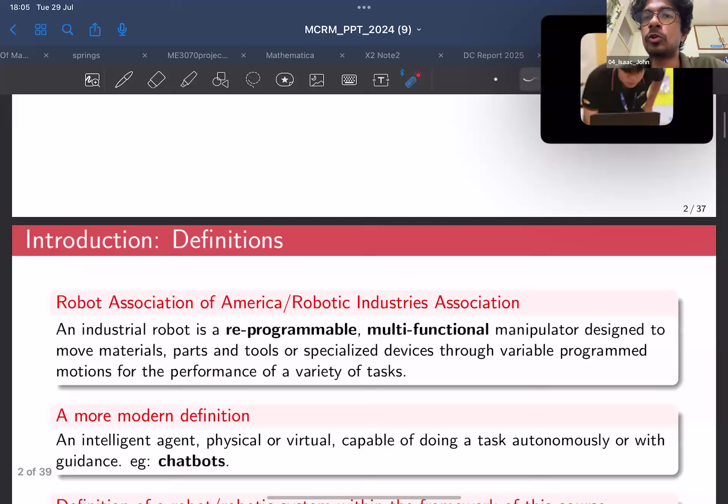Then we talk about transformation matrices, which combine information regarding position and orientation of rigid bodies. We also see compound rotations, where you have simultaneous rotations about multiple axes, and how to represent them using transformation matrices. So we'll start with brief definitions of the term robot, because this is what we are focusing on for this course.

According to the Robotic Industries Association, an industrial robot is a reprogrammable multifunctional manipulator designed to move materials, parts, tools or specialized devices through variable programmed motions for the performance of a variety of tasks. The important term to notice here is that an industrial robot is a mechanical system that we can reprogram.

Unlike machinery from a vehicle assembly line, which is not reprogrammable, most things you find in industry are fixed, designed to perform a single task. But in a robotic system, the entire mechanical manipulator or architecture can be reprogrammed for a variety of tasks and applications.

For example, you can task it to pick an object and place it onto a different conveyor belt, or use the same robot for spray painting applications. So it's very agile in that regard; you can deploy the same robotic manipulator into a variety of tasks. A more modern definition says a robot is an intelligent, physical or virtual device capable of doing a task autonomously or with guidance. Earlier we were discussing the manipulator.

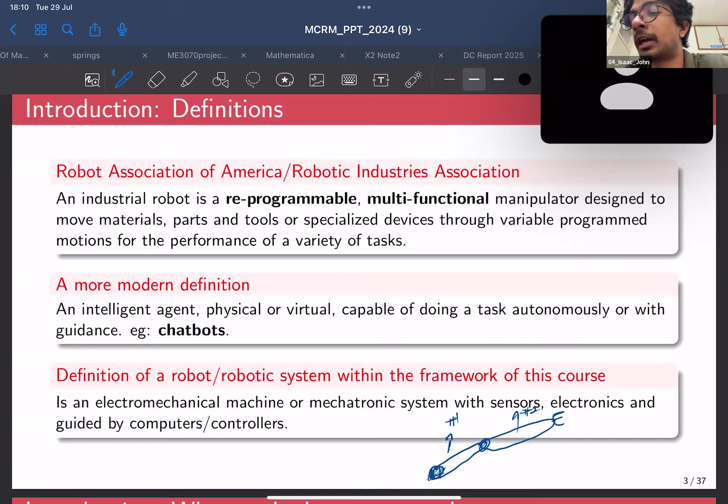For example, if you consider a robot with just two links, like so, this can be considered a robotic arm, right? I'll label this as link 1, and this as link 2. The first link is mounted or fixed to the ground using a fixed link, and then you can connect them using revolute joints. That would be the primary component of a robotic system.

Then we would have to embed the mechanical architecture with sensors and actuators. You can call the motors the actuators, probably here and here, so that we'll be able to control the motion of the robot. We also need sensors to detect its current position. One typical sensor we commonly use to determine the position of a robot is the encoder, right? We keep it on the same axis as the motors, so that we know how many degrees the joint has rotated.

So we'll basically combine a mechanical system with sensors and actuators, and using the information from the sensors and actuators, we'll be able to guide the mechanical system to whatever position we want to move it.

All right, then we talked about the 4Ds of robots. This gives an idea of where we would deploy robots. Typically, we deploy robots in tasks that can be classified as dull, dirty, dangerous, or difficult. I suppose these are self-explanatory, right? A task can be very dull for a human being because of its repetitiveness or physical exertion; doing repetitive tasks for an extended period is dull, and eventually the human's efficiency in performing the task repeatedly would drop.

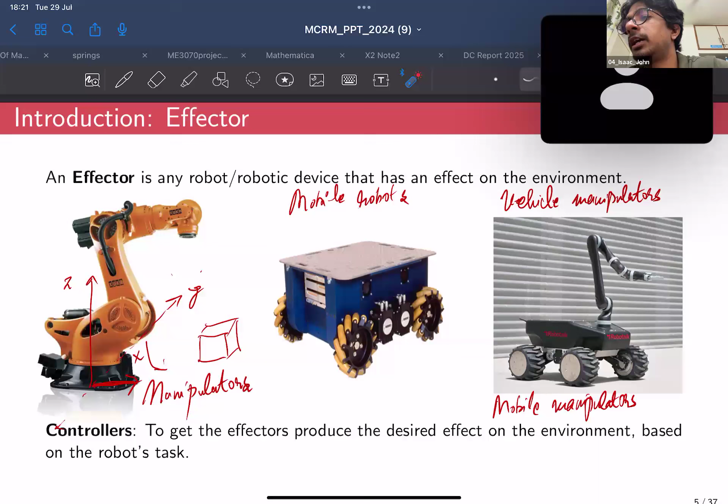Whereas in case of a mobile manipulator, it would be the combination of two. There are combinations of effect on the environment, and the resultant reaction would be the motion of the mobile robot as well as the motion of the objects within the environment. So that is the difference between how you classify a manipulator or a mobile robot. It all depends on the effect the device has on the environment. And for this course, we would be focusing more on manipulators.

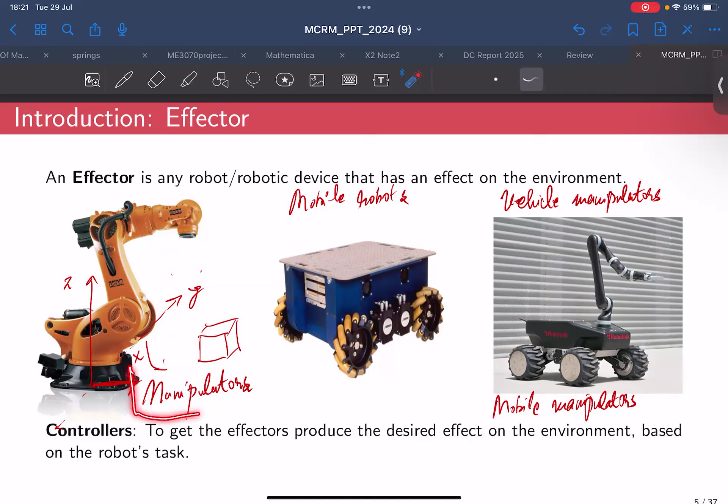Right. So now we look on to the different types of manipulators. So over to your left is a class of manipulator, what we call serial manipulators. The reason we call them serial is because the links are attached serially, one after the other. So there could be one link, the base link here, and to the base link you have another link attached serially, and to this link another link is attached. So the links are attached serially one after the other.

So if you draw a schematic, it'll look something like this. You have a base, and you have one link attached to the base. I label this as link 1. And at the tip of the first link, you will have another link, link 2, and so on and so forth. You can have any number of links, right? And at the very end of the farthermost link, you can have a gripper or any sort of end effector. So as you can see, the links are attached serially, one after the other. That is what we call serial manipulators.

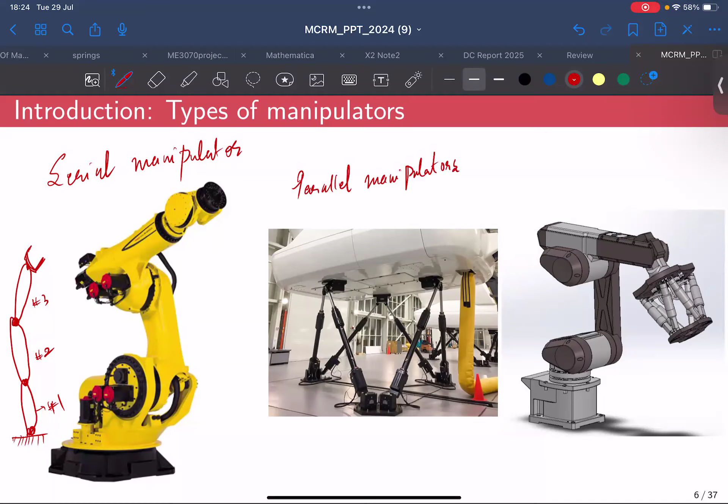Because here in this case, you can actually see that the top platform and the base are connected using parallel legs. And you can control the position and orientation of the top platform by controlling the length of these individual legs. These are telescopic legs. There is a prismatic joint in between, so that if you extend or contract this prismatic joint, the position and orientation of the top platform would change.

We would use these sort of mechanisms in aircraft simulators, where this would represent the cockpit, and people would be staying inside this capsule, so that it will basically give a real-life simulation of an aircraft cockpit. So depending upon the inputs that the pilot gives, the platform will simulate the appropriate motion.

These days, these are not only used in cockpits, they're also used in race car simulators. If racing drivers want to train or test a new circuit, they would use these sort of platforms, and the driver would sit on top of this. The platform would mimic the seat of a race car. And depending upon the input that the driver gives, the platform would simulate the appropriate motion, depending upon how fast it's going, whether he's turning, or whether he's braking or accelerating. Those sort of motions would be replicated by the parallel manipulator.

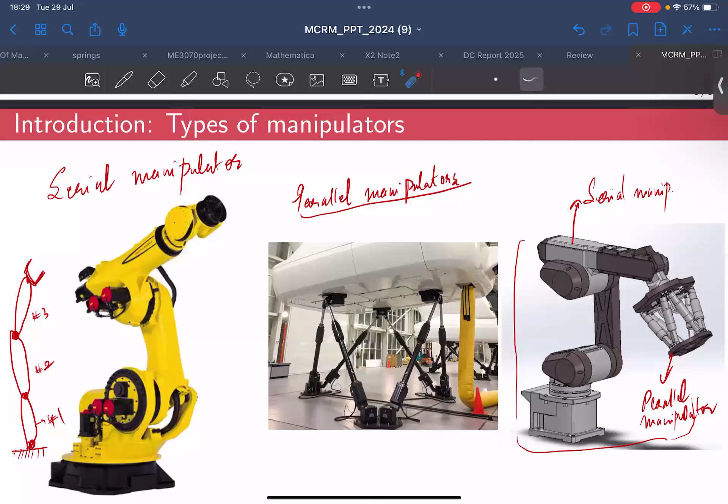Yeah, now we talk about a few key definitions or a few key terms regarding the manipulator.

So essentially, yes, sorry, yes. Yes. The explanation is great overall. I just had two doubts about the meeting itself. First, will the recording be provided to us? Yes, the recording will be provided. The problem is that I'm having some sort of an issue with today's recording, because I'm doing it in a different way than I'm supposed to. I cannot record it from my PC. On your tablet? It's on my tablet. It should be accessible, and if it is there, it'll be provided. Okay, and also, I was 5 minutes late to the meeting, so was there any attendance form given? No, there is no attendance for the meeting. Okay, got it. Thank you.

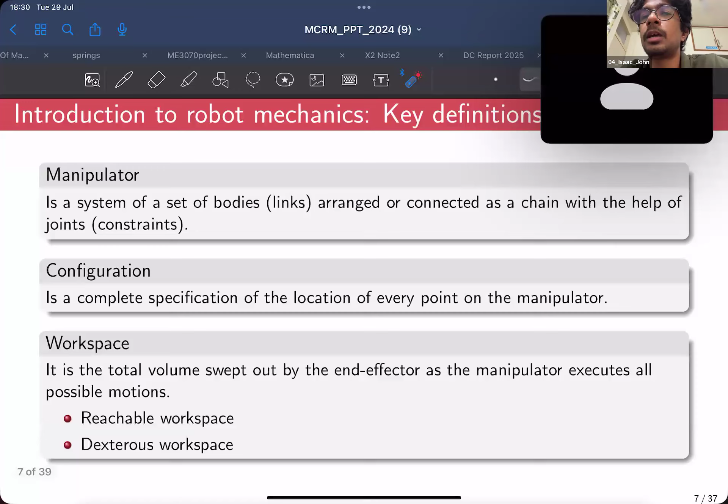Okay. All right. So now we talk about some key terms regarding manipulators. A manipulator is nothing but a system of bodies or links arranged or connected as a chain with the help of joints. So we have discussed this earlier: we have a series of rigid bodies which are connected by joints. We'll talk about different kinds of joints, maybe in the upcoming weeks. But mostly we'll be dealing with revolute joints or hinge joints, which have a single degree of freedom, as well as prismatic joints, sliding joints that also have a single degree of freedom.

Then another term that we would be using recurringly in this course is something called a configuration. The definition of configuration is a complete specification of location of every point on the manipulator. So for example, if we consider a manipulator with just two links, I'll show one example. So if this is the first link, and this is the second link, the big circles are used to represent the motors, and the first joint is actually fixed. The motor is rotating on a fixed hinge. This is the second link.

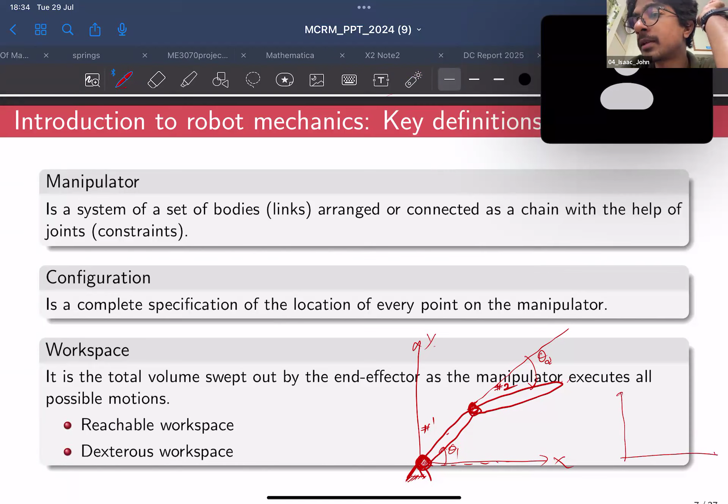Right? So if you have a global coordinate system like so, the x-axis and the y-axis, at all instants of time, you can define the x and y coordinates of any point using these theta1 and theta2 coordinates. Whereas in the case of a 4-bar mechanism, a closed loop mechanism like this, you will have 4 links, but it will be connected as a closed loop like so. You will have one joint over here, another joint over here, another over here, another over here. So you basically have 4 such links.

So in this case, you only require a single joint variable so that each and every point of the robot can be fully defined, right? We'll see all these cases when we are discussing the forward and inverse kinematics: how you can define the entire configuration of a robot with just 2 variables in case of a serial manipulator. But in case of a parallel manipulator, it becomes more complex actually. As you can see, there are 4 bodies, but you are specifying the configuration of all 4 bodies just by a single input. Right. So that's about configuration.

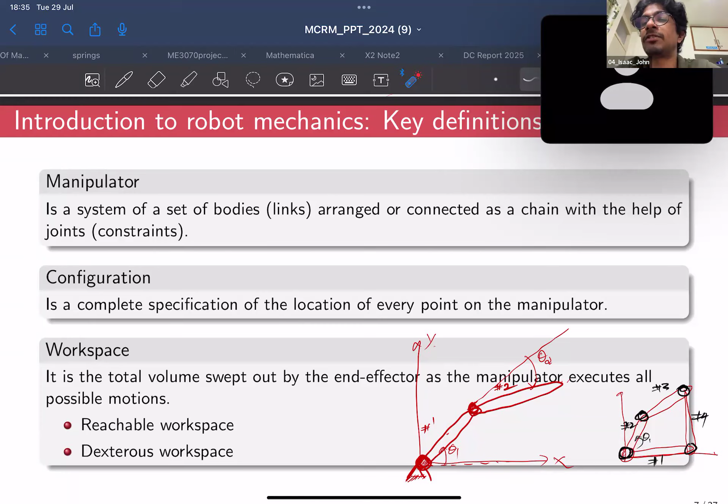It specifies the location of every point on the manipulator, and then the next term is called the workspace. This is also a very important feature in a robotic manipulator. This is the total volume swept out by the end effector as the manipulator executes all possible motions, right? So if you have a robotic manipulator with 2 joints, and you consider the tip of the manipulator as an end effector, maybe a gripper, the set of all points that can be realized by the tip of the robot is called the workspace of the robot.

So to visualize the workspace, in this specific case, you have to rotate this theta1 joint in all possible rotations. Maybe this joint can rotate from 0 to 360, and same goes for theta2. Maybe it can also rotate from 0 to 360. So if you combine all the rotations for the two joints, the net volume or the net cloud of points that the manipulator can realize is called the workspace of the robot.

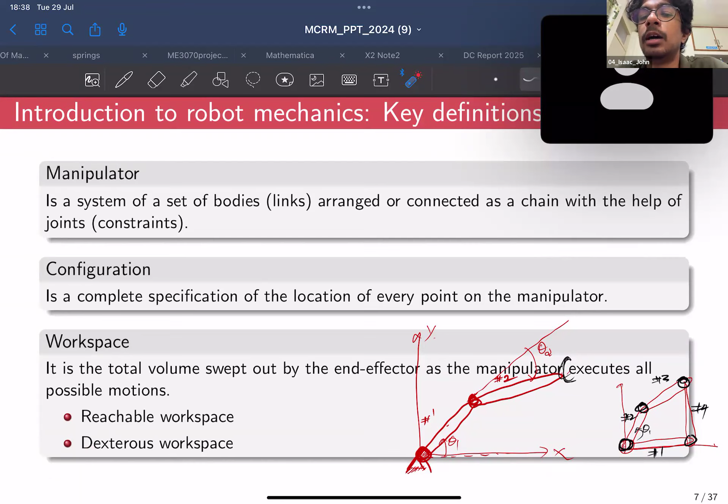Whereas in reachable workspace, you can only reach by a single or a very limited set of orientations, dexterous workspace are points where an infinite number of orientations are possible. So those are the key differences regarding the reachable and dexterous workspaces.

And then we would also talk about one key definition. It's called the degree of freedom. Throughout the course, you will be hearing this term, degrees of freedom. It's an important aspect based on which you would classify the robots, or how you would describe a robot. The fundamental way to describe a robot is by using its degrees of freedom. So the definition says degrees of freedom are the minimum number of independent variables required to describe a system, right?

So I hope you can recall, when we discussed the configuration of a robot, in case of a serial robot with two links, we used two variables, theta1 and theta2, to describe its full configuration. So you can say that robot has 2 degrees of freedom because we need two variables to describe its configuration.

Whereas in the case of a parallel robot, it would be fewer than the number of links. You would probably only need a single variable to describe its entire configuration. So that's what it says: the minimum number of independent variables required to describe a system.

And then another term called degree of manipulability. It's essentially the number of controllable inputs or active joints. In terms of manipulators, these two definitions do not make much of a difference. Degrees of freedom and degrees of manipulability correspond to the same thing. But in case of a mobile robot, these two definitions can change. There is a different meaning to a degree of freedom, and degree of manipulability could be something else. But in robotic manipulators, both of them correspond to the same value.

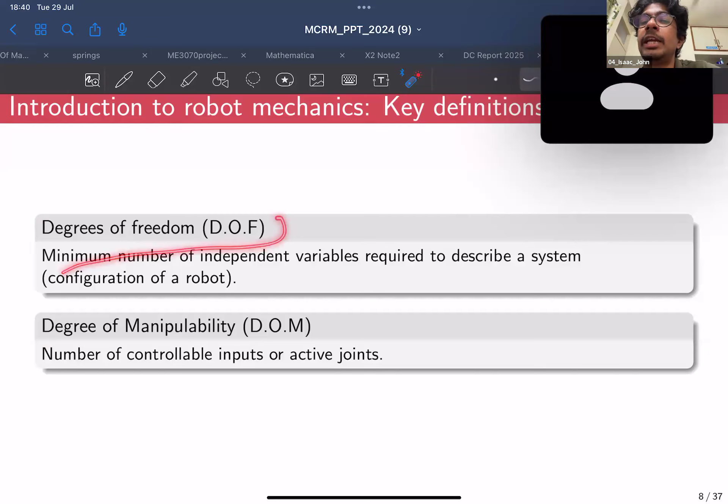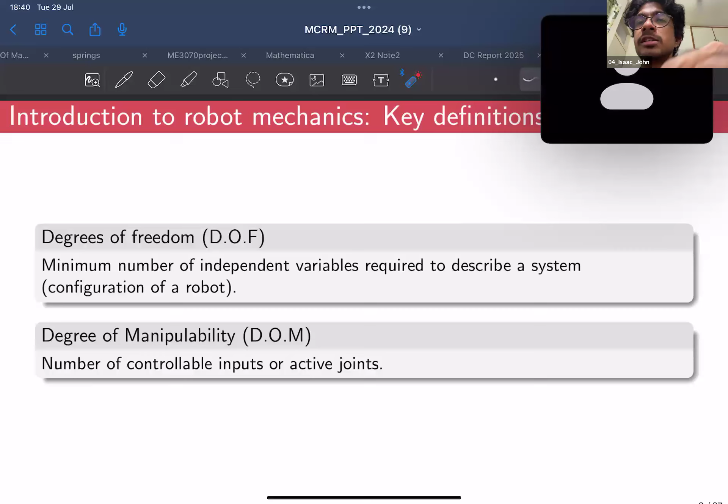But we will mostly stick with the degrees of freedom definition. We'll familiarize ourselves with all these definitions as we go through the contents of this slide.

Now we move on to the aspects of robot mechanics. Kinematics is a part of mechanics, where we just study the motion without considering the forces or efforts that cause the motion. In kinematics, we are only interested in: if you rotate the joint by 2 degrees or 3 degrees, what will be the configuration of the robot? We are not really bothered about the forces that cause this sort of motion.

For example, if you simply drop a manipulator under the influence of gravity, unless you are energizing the motors, it will most likely collapse. But in kinematics, we are not bothered about the effect of forces. We are just trying to figure out the relation between the inputs and the outputs. In a robot, we give inputs to the motors, and the output is what the robot is executing. So we are only interested in studying the input-output relations.

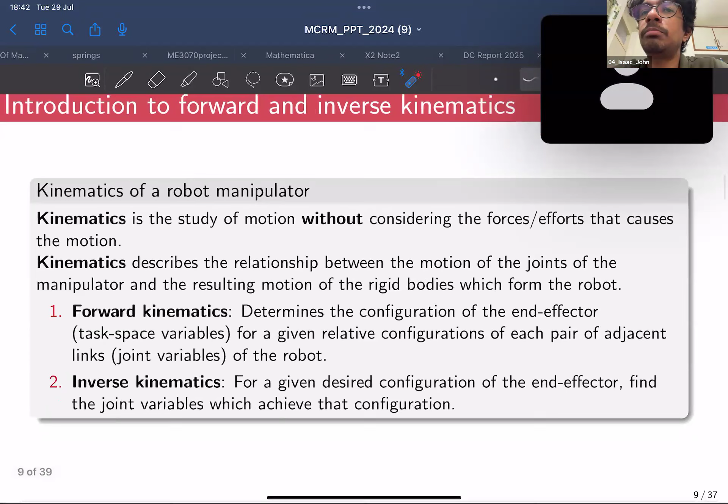So there are two problems in kinematics. The first is called forward kinematics, and the second is called inverse kinematics. With an example, I'll elaborate what forward and inverse kinematics mean. As before, I'll draw a robot with 2 links. We call this a 2R robot. I'll write it over here, 2R. This R stands for revolute or rotary.

2R manipulator. The reason we call this a 2R manipulator is because it has 2 revolute joints, or 2 rotary joints, like so. I'll call this R1 and this R2. And at the end, you have a gripper. I'll write it over here, a gripper, like so.

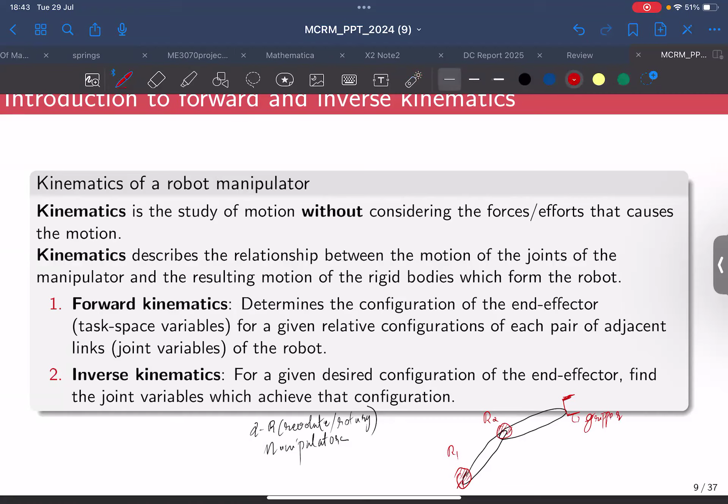As I've said earlier, you can give inputs to the motors. I'll represent the inputs to the motors using the 2 angles: θ1 and θ2. And I'll also depict the positional coordinates of this gripper using the Cartesian x and y coordinates.

So in the forward kinematics problem, if you are giving any combination of θ1 and θ2, any inputs to the motors, what would be the position of the gripper, or the tip of the robotic arm? That is what forward kinematics is trying to do. I'll just write it over here. You have θ1 and θ2 as inputs.

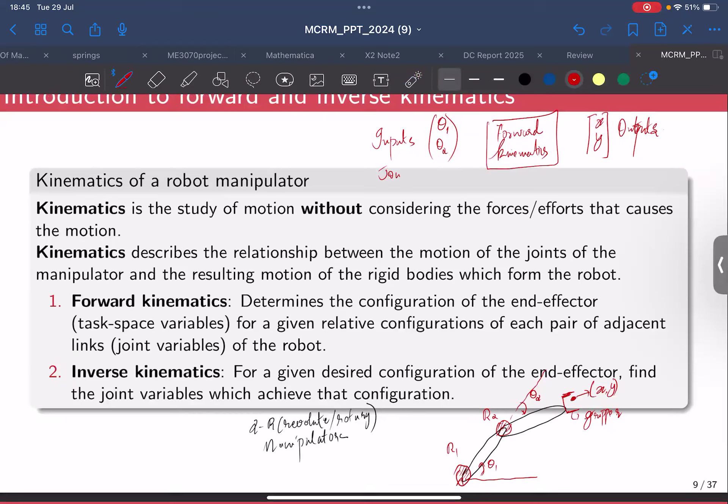And using a forward kinematic modeling, you will be able to get the outputs, maybe the x and y coordinates of the robotic arm. These are outputs, right? So typically, we call these angles, the inputs to the motors, as joint variables. We would be using this terminology throughout the course. We would call this as joint variables, because these correspond to the angle the joints rotate, right?

If there are 2 links, this could be the first link and this could be the second link. The rotation by which the links rotate about its own joint corresponds to the joint angle, and these inputs are provided by the motors. So we call them as joint variables, or another term is configuration variables.

And the coordinates that we use to represent the position of the end effector or the gripper, we call them by the name task space variables. Or you can also call them as operational space variables. Right? So for any given theta1 and theta2, what will be the x and y coordinates?

So this is like a simulation of a robot, right? You're trying to see how the robot reacts or how the robot responds if you try to give the inputs to the motors. Right? So that is more or less similar to how you simulate a robot, or just to understand how a robot works. That is about forward kinematics.

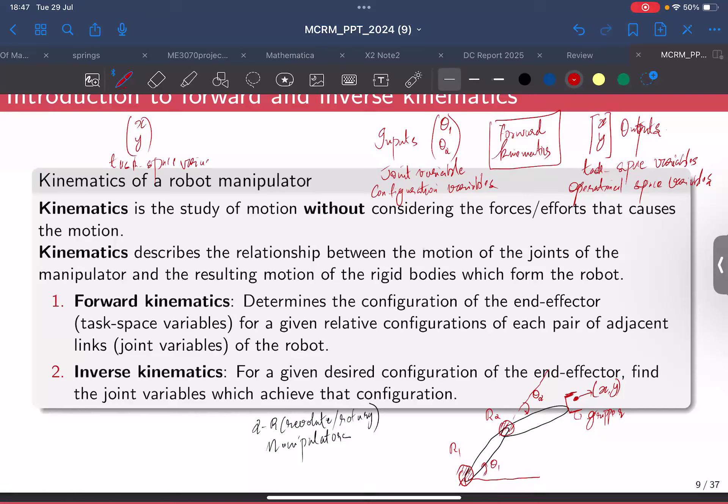But in case of inverse kinematics, it goes from the opposite direction, right? So you give the final position of the end effectors, maybe some desired position of end effectors, as your inputs. Maybe this is the task space variables. And using an inverse kinematics modeling, you will be able to figure out how much you have to rotate the two motors.

So this is like, if you want to control a robot, you have to solve the inverse kinematics problem, right? Suppose you want your gripper to move to a position, to pick up an object or maybe to drop an object. For example, I'll give this blue dot as X desired and Y desired. This is where you want your robotic arm to move. So in that case, what should be the joint angle, or what should be the inputs that you should be giving to the motors? Solutions to such problems would be obtained using this inverse kinematic scheme.

So in case of a manipulator like this, if it wants to reach this orientation, it can go like this, right? So with the correct joint angles, you can actually reach that final goal position. So that is what we use inverse kinematics for. So that is the difference between forward kinematics and inverse kinematics.

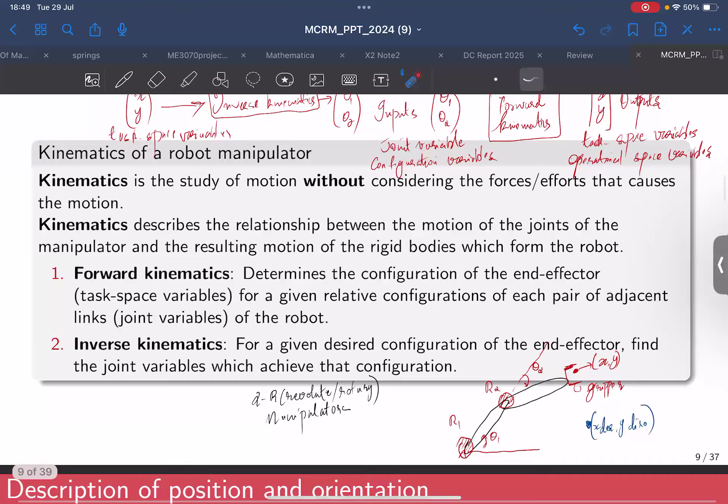Right. Now we move on to describing positions and orientations of the robot. This section is actually very important because we use some standard practices to describe the position and orientation of the robot. And most of the robots that we are dealing with have spatial motion capabilities. They can move in X, Y, and Z axes. They can also rotate about the three axes. So their motion is actually very complex.

The motion between two rigid bodies can be very complex. And we want to find a unified standard way to describe the position and orientation of multiple rigid bodies. So the easiest way to represent complex motion of rigid bodies is by attaching frames on the rigid body. For example, I'll show one example. If I have two rigid bodies, let this be one rigid body. It has two joints at two of its ends. You have another rigid body like so.

So imagine you can consider these to be floating in space, right? They are not connected with each other. They are basically floating in space. So I label this as rigid body 1. I label this as rigid body 2. But in robots, these rigid bodies would be connected. That is a different issue, right? So at the moment, we'll consider them to be disconnected.